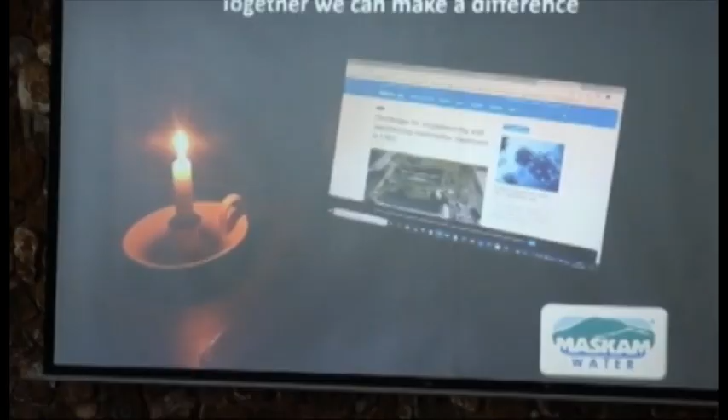Right, let's look at where we can make real big impacts. Wastewater. Now things have changed quite a bit now compared to 5 years and 10 years back. But in general, if I have to say to you, you have a high density commercial area and you now need to start treating wastewater and use it. How many people think it's possible to do that in a high density city environment?

That's only 4 people in the entire room. Well, okay, you're one of the 4, Laura.

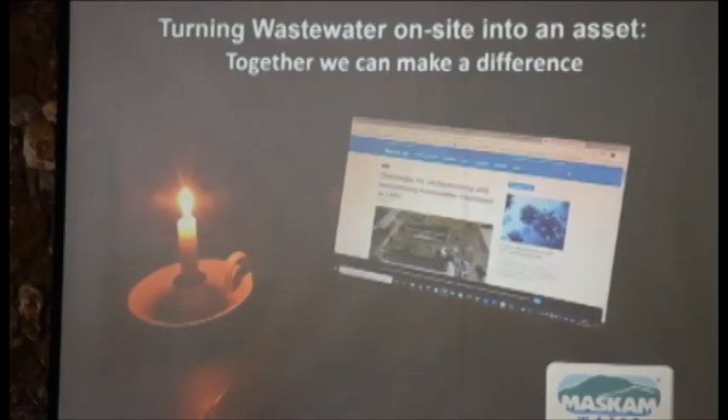Let me show you something. First of all, let's look at our water cycle. We have our catchment area, which normally the water ends up in a dam somewhere. We abstract from that dam, we put it through a filtration system, we use it, we discharge it through an overloaded municipal wastewater treatment works, and we pollute our water course.

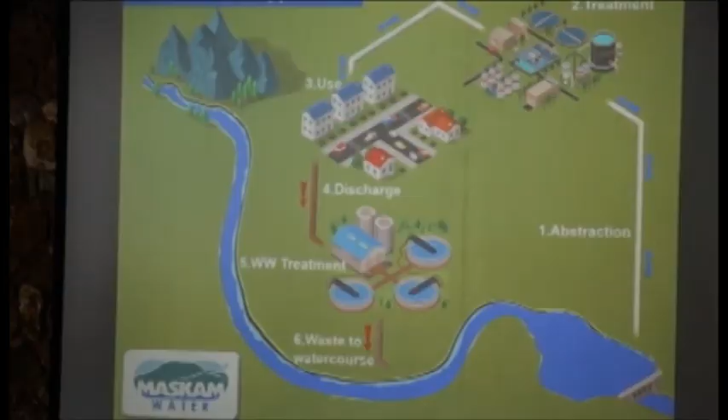Now this is very important. Remember what I said earlier, when you flush it, it's gone, it's out of sight, it's not your problem? Look what's happening here. It's coming back to be your problem because you're feeding it into water courses that feed your drinking water. I do apologize for the sensitive ears, but you're literally pouring in your own drinking water. When you discharge your wastewater to a non-functional or overloaded municipal wastewater treatment work, you're pouring in your own drinking water. There's no nice way to say it.

Okay, now, but in my town it's different because in my town this wastewater system discharges below the dam wall. Oh, beautiful, you just feed it to your neighbor. Come on, where's Ubuntu here? That's what we end up doing.

At a previous meeting, I said, okay, everybody by a show of hands who believes eating healthy is good. And just about everybody put up their hands, and the next thing I asked is, who likes some nice grapes every now and again? And everybody put up their hands again. I said, now you think if you flush a problem in Gauteng, it's going to go down the Vaal River, it's not your problem? Guess what?

Your grapes come from Upington. The farmers in Upington have a problem with E. coli in their water in the river because that river is coming from Gauteng. So you export your sewage problem to Upington and you import it back in the form of grapes. That's how the water cycle works, whether we like it or not.

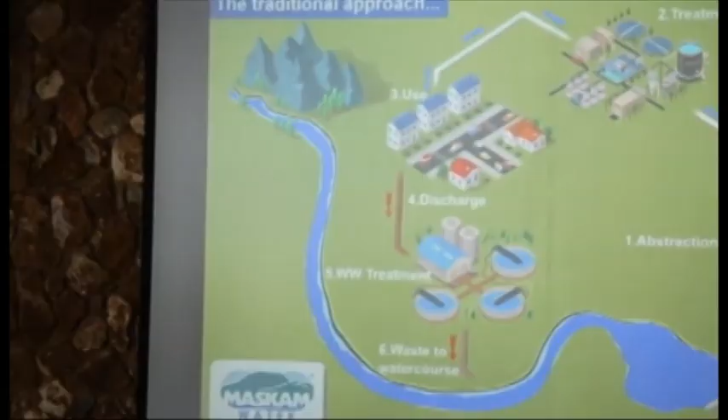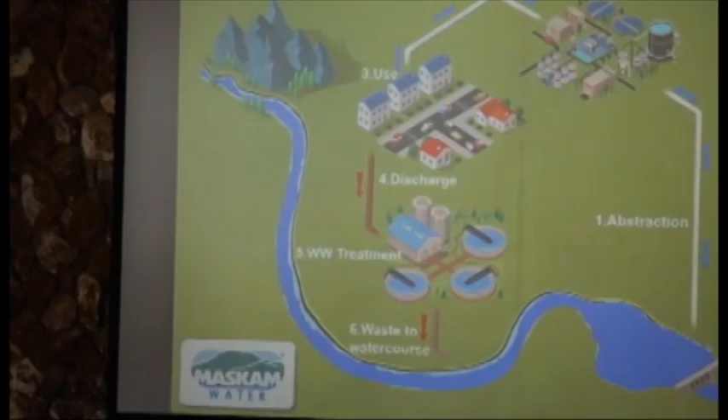But there's another little problem here. The other problem is if you look at the carbon footprint. Again, not many people think that water has a carbon footprint, okay? It's a natural thing. How can that have a carbon footprint? Would you agree? Well, the problem is, if you're in Pretoria and you get water from the Vaal Dam, what's the figure? About 60% of Pretoria's water coming from the Vaal, I think.

Well, if you look there, that's 124 kilometers line of sight. So you're looking at about 150, 200 kilometers of pipeline that you need to pump that water. But your problem is from here to there is a 300-meter rise. You need 30 bars of pressure to lift the water to Joburg before you can flow it down to Pretoria. 30 bars of pressure, to give you an idea, your irrigation system at home runs on 3 bars. Your average geyser runs at 4 bars. We're talking 30 bars here to lift that water to Joburg before you can get it to Pretoria.

What is your carbon footprint on that pipeline? What is your carbon footprint on those pumps? What's your carbon footprint on the electricity that you use for that? Now we're not even talking purification and all the other stuff that goes with it. So your cost and your carbon footprint becomes huge in cases like this.

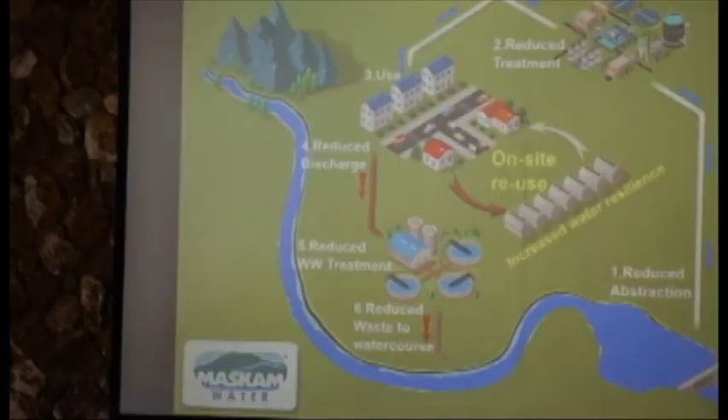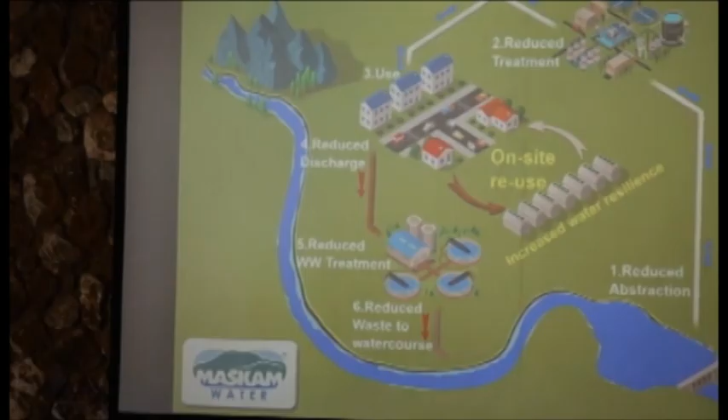So what we now do is we start thinking a little bit different. When we do on-site reuse, so whatever wastewater we have here, we treat on-site, we take it back. We now start talking about increased water resilience. And remember, every time you flush a toilet and you treat it, you have water to flush the toilet again, no matter whether the municipal water is on or off.

So we're also talking continuation of operation, because people can stay on site, at least they can use the ablutions. Yes, you may have to buy water from your local grocery store for making coffee, but at least you have water for ablutions that you don't have to truck in. But the minute you do this, you reduce your abstraction from your water course.

You reduce the pressure on your treatment system. You reduce your discharge, you have fewer overflowing sewer manholes, and you reduce the volume in Olifantsfontein wastewater treatment works. So you get a better quality effluent feeding the Hennops, which eventually feeds Harties again. So you improve your total water cycle. You score big money here.

Coming back, I don't have the figures on right now for City of Tshwane, but City of Joburg, commercial again, we're talking 98 Rand a kiloliter to get water from there. For commercial reuse here, you can do it for as little as 8 Rand. A saving of 90 Rand. There's a saving of close to 90%. Which other investment will give you a saving of 90%? Come on, think about it.

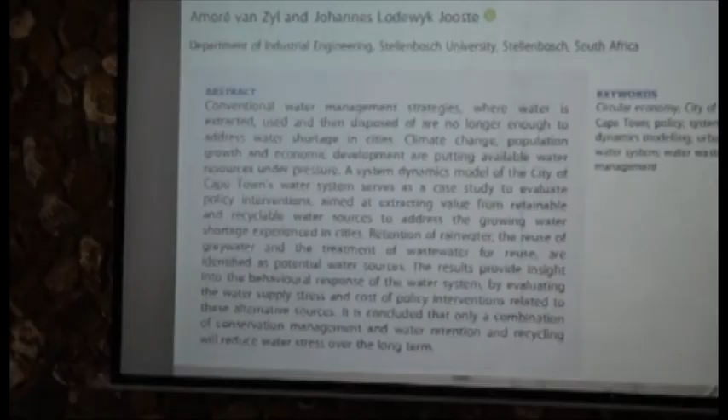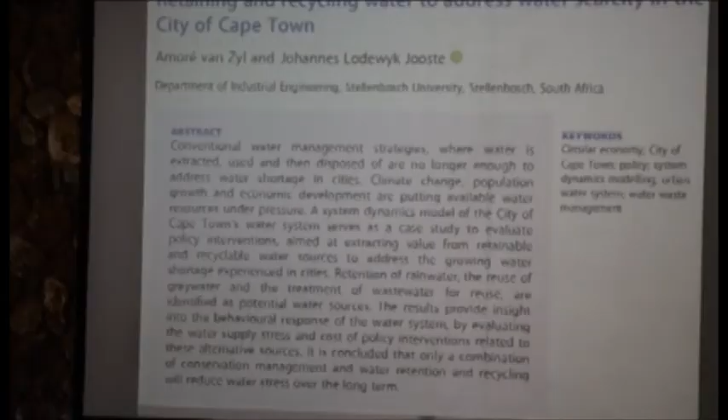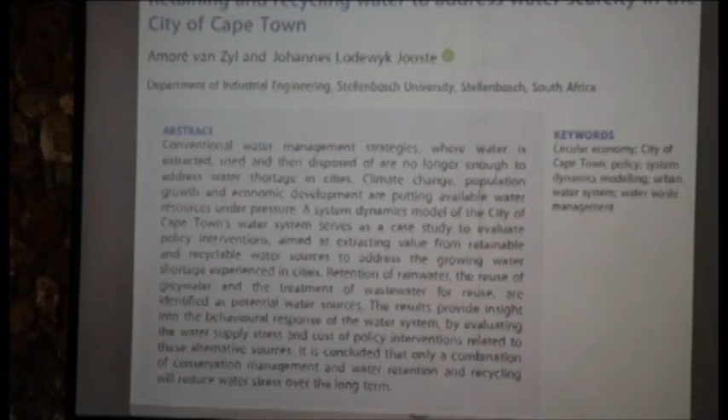In 2020, the University of Stellenbosch, and I'm not going to try to give you all the details, but in 2020, the University of Stellenbosch said, retaining and recycling water to address water scarcity in the city of Cape Town. They looked at all possible water sources taking Cape Town into the future. They excluded desalination because of the cost. And there's this whole document. If anybody wants it, we can email it to you, talking about the benefits and how you can move forward and how recycling will save the day and for Cape Town become a water source for the future. Exactly the same thing applies here.

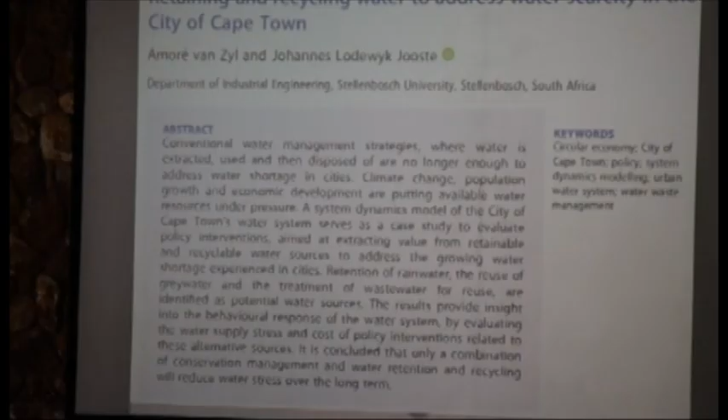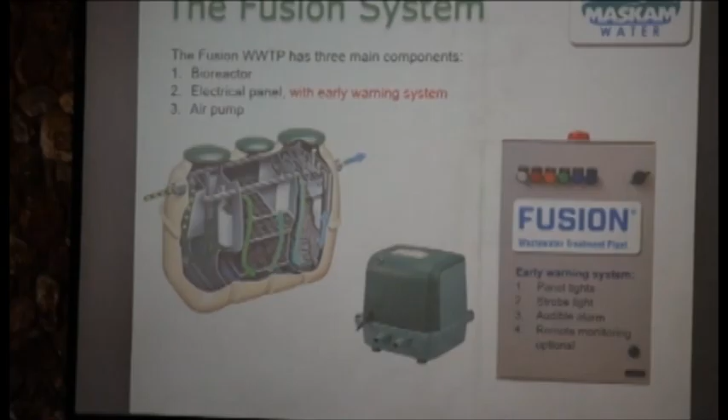I'm going to show you one technology. There's not enough time to go through different technologies. Yes, it is our technology. I'm a little bit biased here, okay? The fusion system, which is an underground installed wastewater treatment plant, and it will recycle your water on site for you. Comes standard with a panel that has an early warning system, so if anything goes wrong with this system, it will immediately warn you before you have a pollution problem. And these early warning systems, I think, are critical, because something can go wrong, it's man-made, but you need to know when things go wrong.

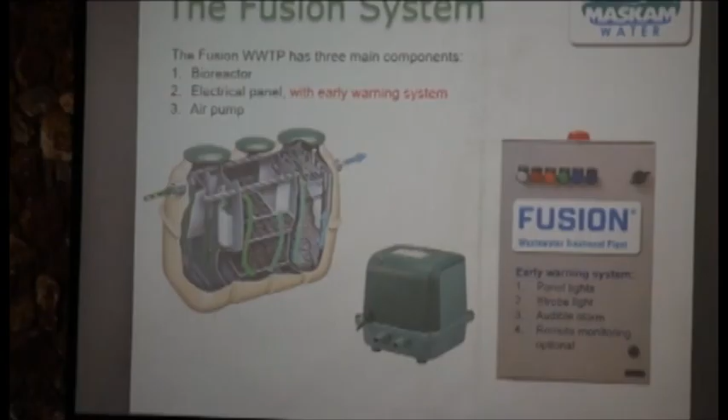I'm not going to spend time on the technical side of it. Just keep in mind, without disinfection, there are at least 6 steps of treatment that need to happen to get to the water quality that by law you need to get to if you want to use a discharge as water. Okay? But at the same time, again, for pollution, otherwise you end up with it again in your drinking water.

Case studies. Where do you think is the highest risk installation you can have in terms of if your system fails, you will have big problems? Where do you think is the highest risk installation? Let me see if I can get 2 or 3 people to answer that question for me. No, you're not allowed to. You know the answer. Come on. Nora, you know the answer, you're not allowed to answer. And so does Andries and Arne. I'm listening, sir. Close to any natural water system, yes. But if you step it up a bit more, where's the highest risk?

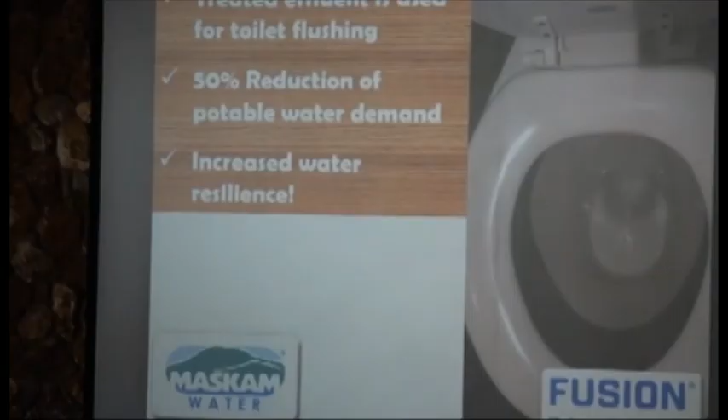Remember I said for domestic toilet flush is about 30%. Here we're talking about the commercial building where toilet flush can be up to 90%. In this case it's 50% because they have showers and stuff as well. So you've just cut your water bill by half. But you have water resilience, you always have toilet flush water. For 6 years going now, I think the case study speaks for itself. You can do it in the city, you can make a positive difference.

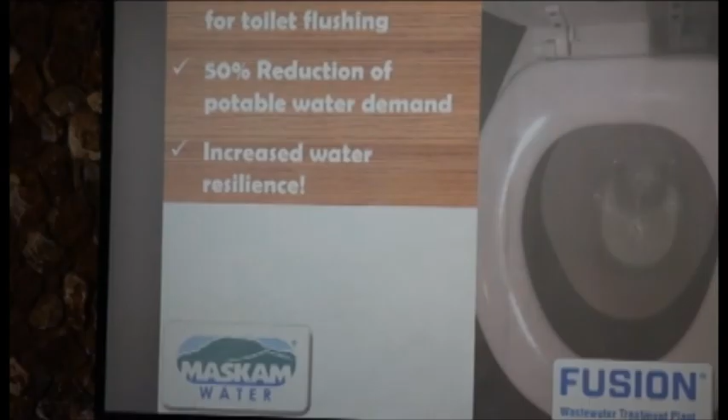And that's why today's theme is talking solutions. Because we hear so much about the problems out in the media already. Let's talk solutions. This is on a small building. You can see how nicely it blends in with the gardens. There's your treated effluent again.

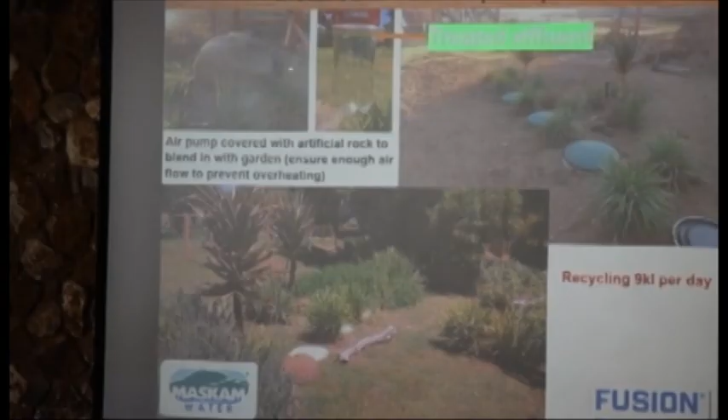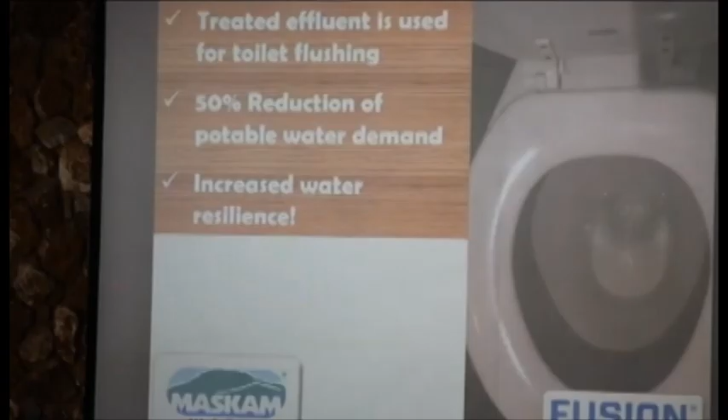Your air pump. Now the air pump, going back a little bit, there's your air pumps there. We had to put in 4 small plants because we physically had to carry them through the building. We couldn't put one big plant in because it just wouldn't fit. But that again is the beauty of having a Lego set. You can pick what's needed. So hiding that air pump there in the garden, we use the false rock.

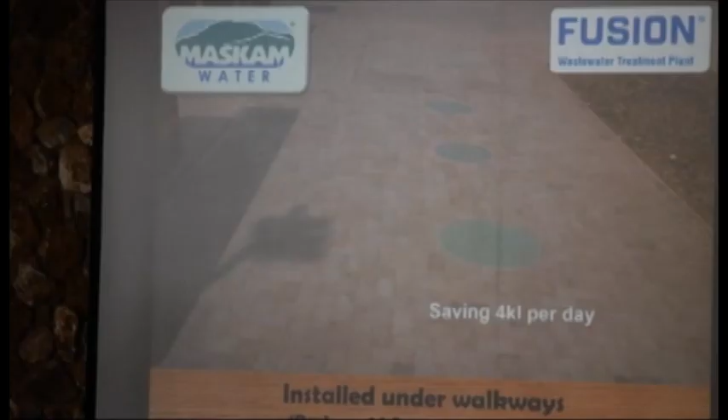In the walkway, in the paving, if you want to drive over it, you've got to do a proper slab. I know Andries has done one where people drive over it in the driveway feeding to a hotel. Unfortunately, Andries, I don't have that photo in the slideshow, but that is also possible. Hospitality industry feeds into the fusion, they use the water for irrigation purposes. There is farms, houses at the farms.

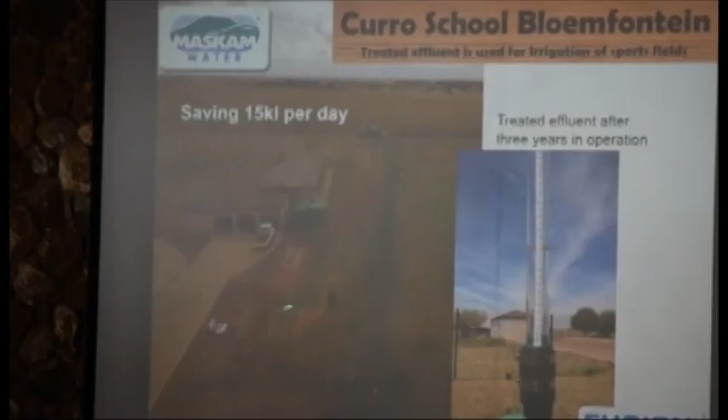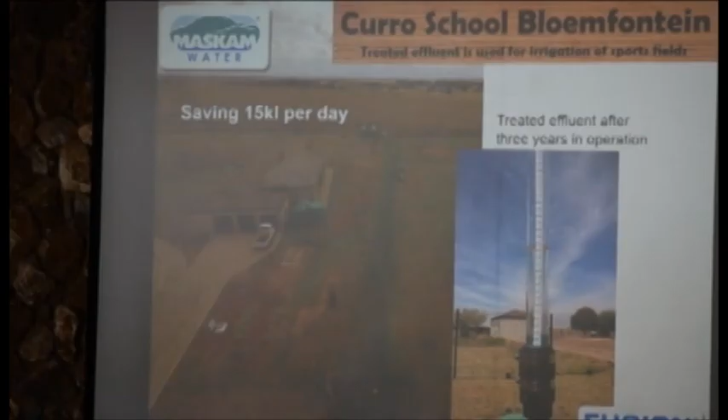Curro School, Bloemfontein. Again, you can see the treated effluent, they're using that for the sports field irrigation. But the beauty, now we start talking modular systems because this was designed for a school having a maximum of 600 learners. So then the school grew, they're just over 800 learners now, so the wastewater treatment plant is too small. Oh, big problem. Nope.

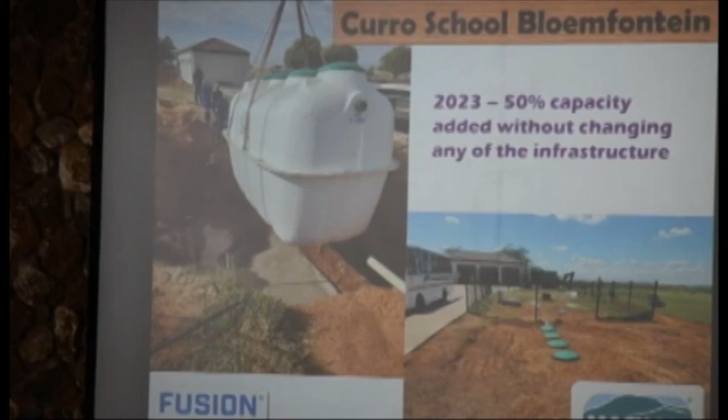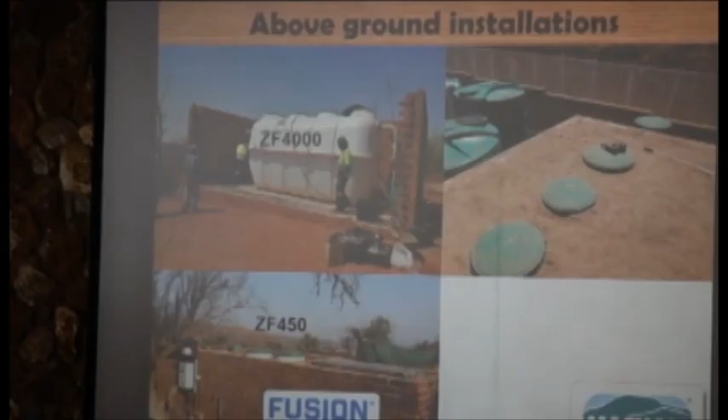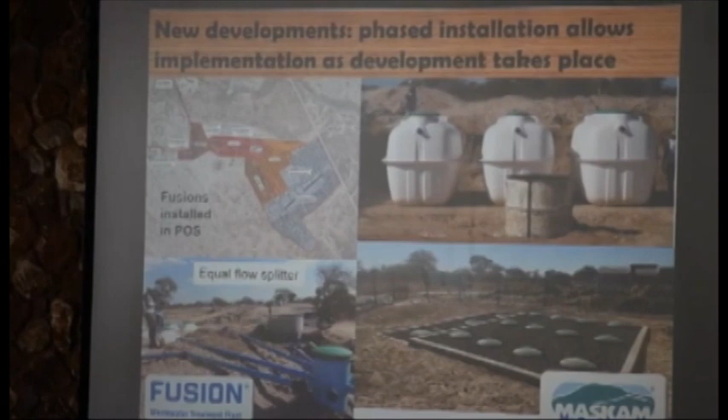this one is in Katima Mulilo, Namibia. Each color is a different phase. So there is phase 1 coming in. They've got 2 phases up and running now. These ones are now up and running, and these phases will still come in.

So even within the development, rather than having a central sewer system at a huge cost and pumping stations, because it's relatively flat there, they decentralize within the development, and each phase will get their own set of treatment plants, and they will reuse the water in that phase for irrigation purposes. What a beauty. You literally do clusters as you move along. There you can see the final grade of the system.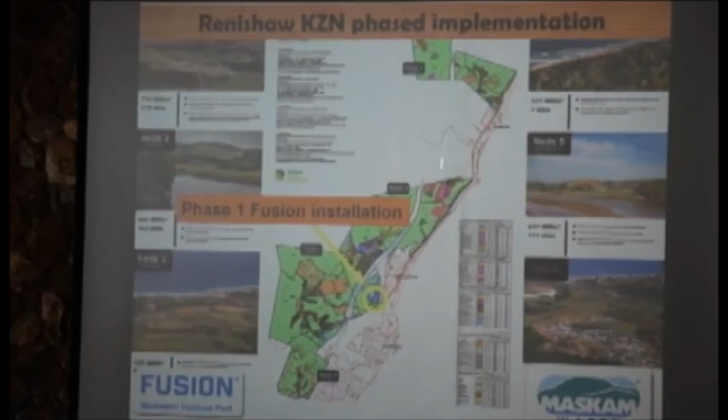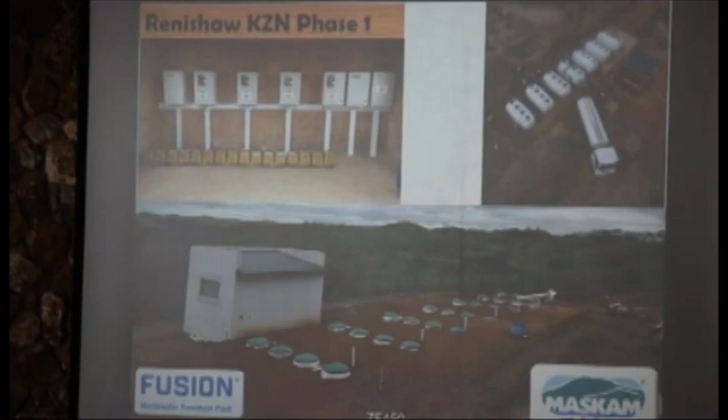This is the shopping center that we've done here, shopping center, filling station and church. And the rest of this development will come as they build. The next phase is in a few months from now. So there you can see what it looks like. These 7 plants standing here will service the shopping center, the filling station, and the church. In the case of a domestic setup, this will serve 140 houses.

It uses 2.5 kilowatts per hour. That's nothing. For 140 houses, 2.5 kilowatts per hour, that's just for the treatment, it excludes pumping back and so forth. It's out of sight, fits in very nicely with your landscape. There are a few more projects like that coming up, and in future we will have some more to show on that. There you can see the 7 tanks during the installation period.

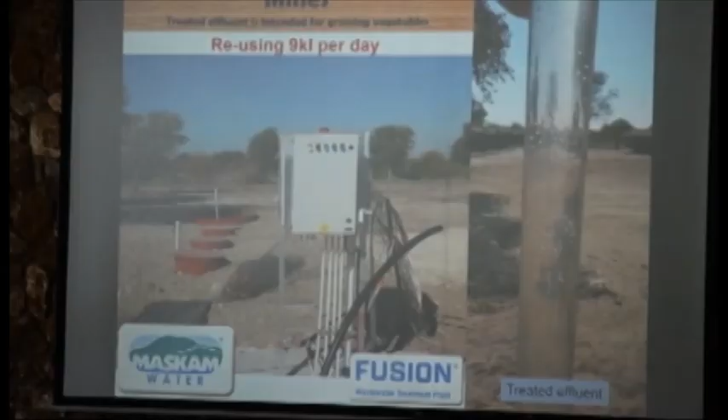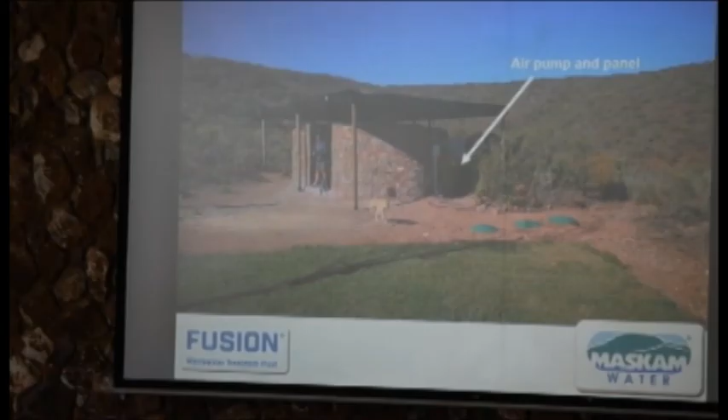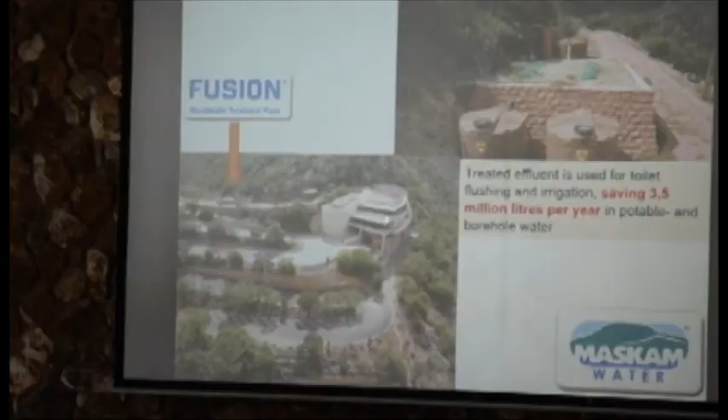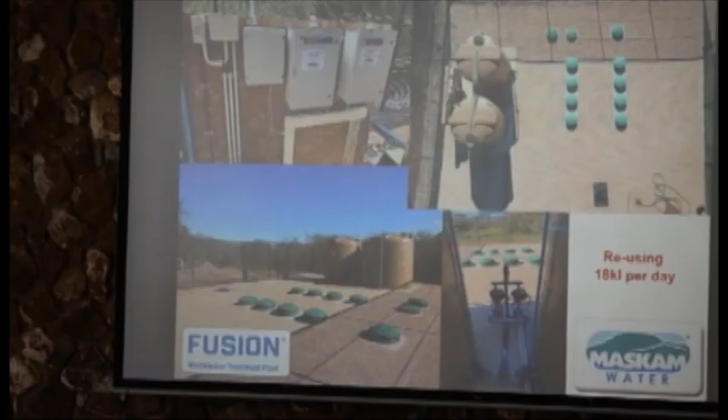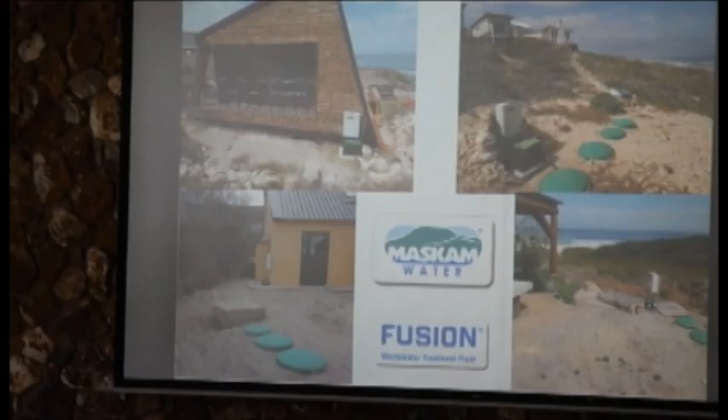So the case studies are just to show you it is possible in just about any location. Different technologies are better suited for certain locations. But you can do it anyway, and you can recycle 100% of your water for non-drinking. If you want to take it to drinking purposes, then you go through a reverse osmosis system. You will have, depending on the system that you use, anywhere between 25 and 45% waste. So there you do lose water. But it also becomes more expensive.

We are busy with a case now where there is no drinking water. There is no municipal supply. The boreholes can only deliver 8% of the total volume needed. Rainwater harvesting is difficult. It's going to be done, but for 3 months of the year there is no rain. So the only option left is that we take treated effluent back to drinking water standards, and then blend it in with the rainwater and the boreholes to be the total answer. So it's doable, but it is your more expensive solution. Your cheap solution is to use that for non-drinking purposes and save your expensive water for drinking, for showering, for human contact.

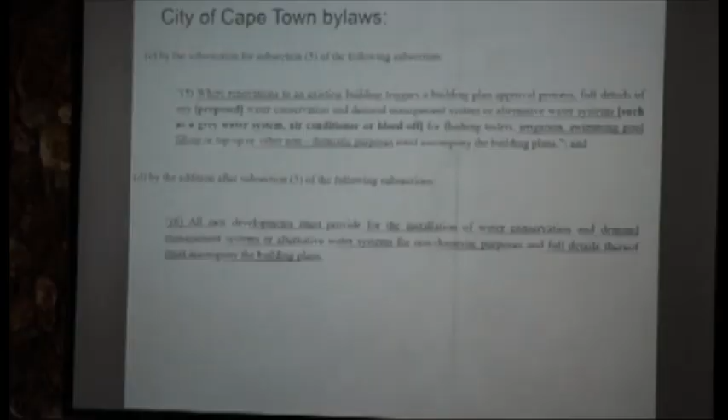City of Cape Town already in 2018 bylaws said renovations and new developments must make use of water conservation and demand management systems or alternative water systems for non-domestic purposes. It's already by law in Cape Town. And I stand to be corrected, but I believe that Ekurhuleni is also coming to a point where they said new developments must do their own wastewater treatment because they can't do it anymore. So these things are changing. Municipalities used to resist this. They don't really have an option now but to adopt this.

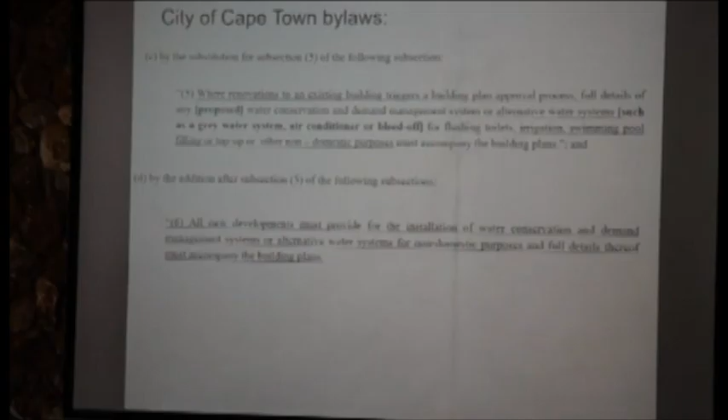Green Cape has done a study also in 2020 promoting on-site treatment and reuse. I may be in trouble for what I'm going to say now, but I'm not known to be scared of trouble. Green Cape, their purpose is to promote green technology. Started up and funded by the Western Cape government and City of Cape Town. Now these are private funders as well. I couldn't quite get Green Cape to buy into this thing. They did a lot of other green stuff, but this wastewater recycling thing, they didn't like that idea. Until I went to show them the case study at Department of Environmental Affairs. Three months later, they issued this paper, because then they saw in proof what is possible.

Another study by them was the Cango Caves. You can read up on the website. They actually give you the numbers. And this is the first property where we did on-site wastewater treatment, August of 2010. The beauty is they're moving that house now. They've broken it down last year, they're moving it. They're taking out the Fusion, they're moving it with. So there's some green material.

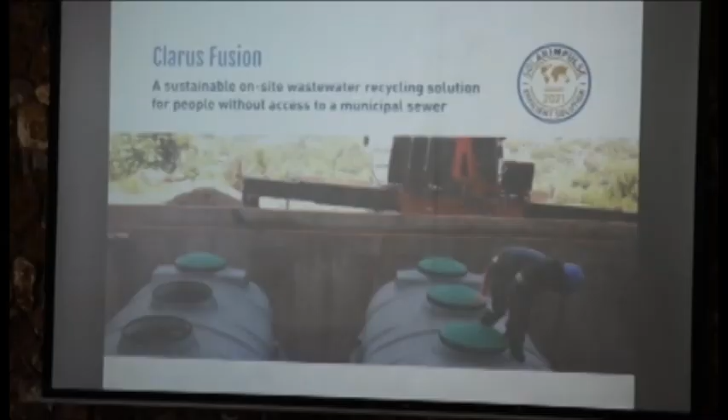Also going to the Solar Impulse Foundation. There's only two companies in Africa that's listed with the Solar Impulse. This is one of them. And to list there's a set of criteria, and one of them is you must already be in commercial operation. It's not a trial or a design or a test phase, it must already be commercially accepted.

Then when we look at on-site wastewater, I'm not going to spend time on that, but we speak to 13 of the 17 SDGs. Not all 13 necessarily on the same site, but we speak to 13 of the 17 SDGs. Now, to all the corporates sitting here, and all the consultants to corporates, if you want to increase your SDG score, have a look at this. This is a way to do it. Now, you can take it one step further.

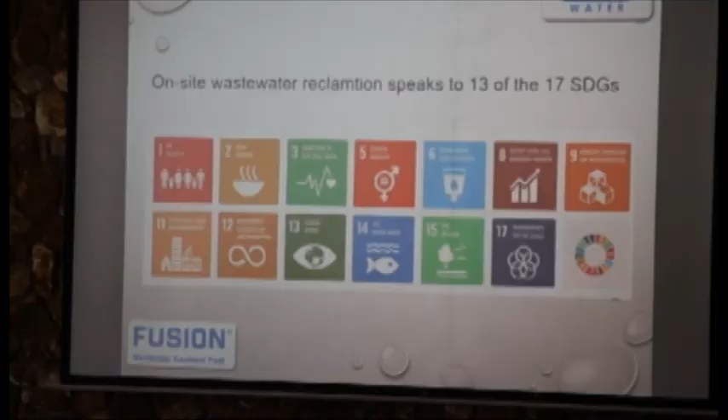If you're corporate, you need to spend your corporate responsibilities. You need to spend money in the communities. When you spend money in a community, you start talking about no poverty, because people can use the water to grow food. You talk about zero hunger. You talk about gender equality. You talk about health. How do you talk about health when you're talking wastewater? It's very simple. Kids don't play in sewage contaminated soil anymore because you're giving proper sanitation. So when you fund something like this for a community, you score SDGs, but you also have your points for your community responsibility. So it's a double win yet again.

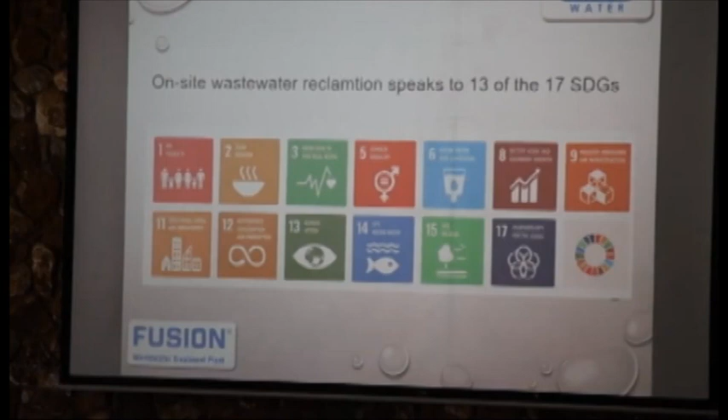And lastly, this is specific to our company. If you look at partnerships, the way we do it is we partner with local installers and local maintenance people. So we create local wealth, build a local economy. And that's where the partnerships come in.

For those of you who say, yes, I'd like to do this, but it's too expensive, I don't have 100 or 200 or 5 million, whatever the case may be, to spend on this intervention, it can be financed. We're working with Capital Box there. So you can finance it, and your saving in buying water can carry your installment. So you're cash flow neutral until your investment is paid off, and then you're cash flow positive. So you can get involved in this intervention without having to fork out the big money that you don't have.

There is also a possibility of rentals that's a bit more strict. We have companies that don't want to buy the equipment, they don't want it on their books, but they will rather have the operational expense of a rental. It is also possible through a financing model.

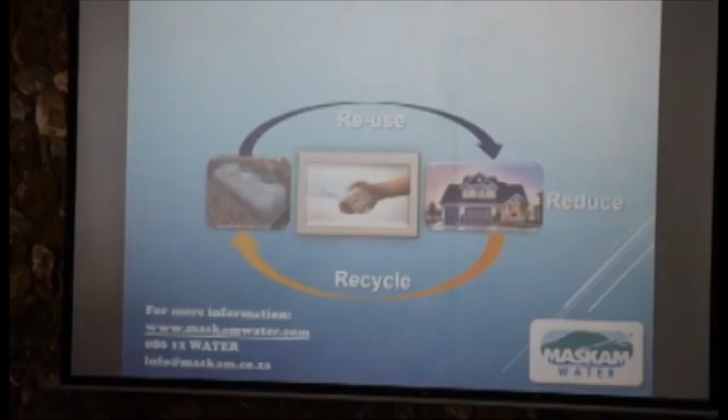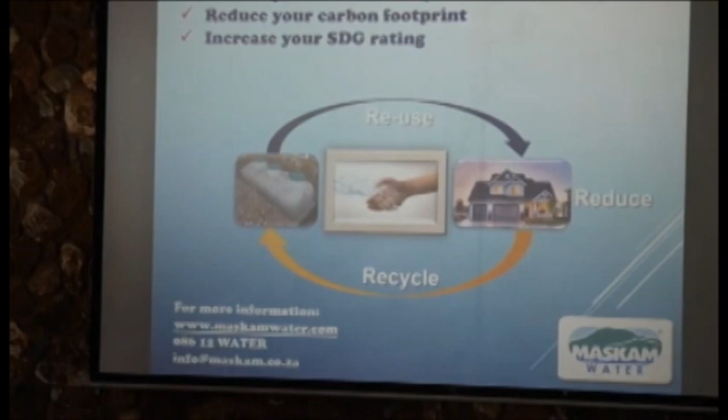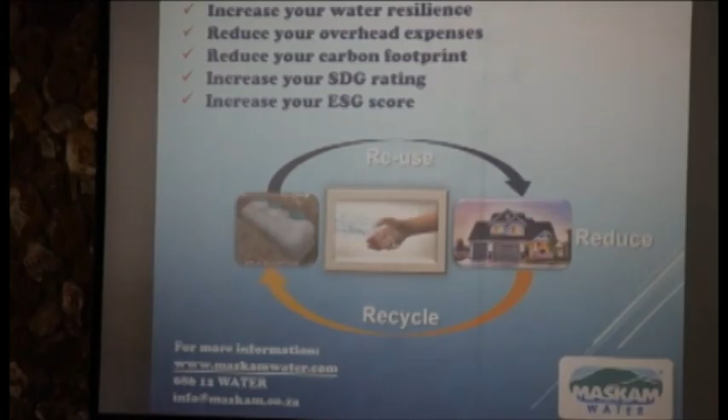So ladies and gentlemen, with that, I want to say on-site recycling will increase your water resilience. It will reduce your overhead expenses in not buying water, or buying less water at least. It will reduce your carbon footprint, increase your sustainable development rating. It will increase your ESG score because for E, environmental, you need to drop your water consumption by 20%. You can do it with this. So you can score on your ESG. And you save our water courses, which Darren will love when you go off grid.